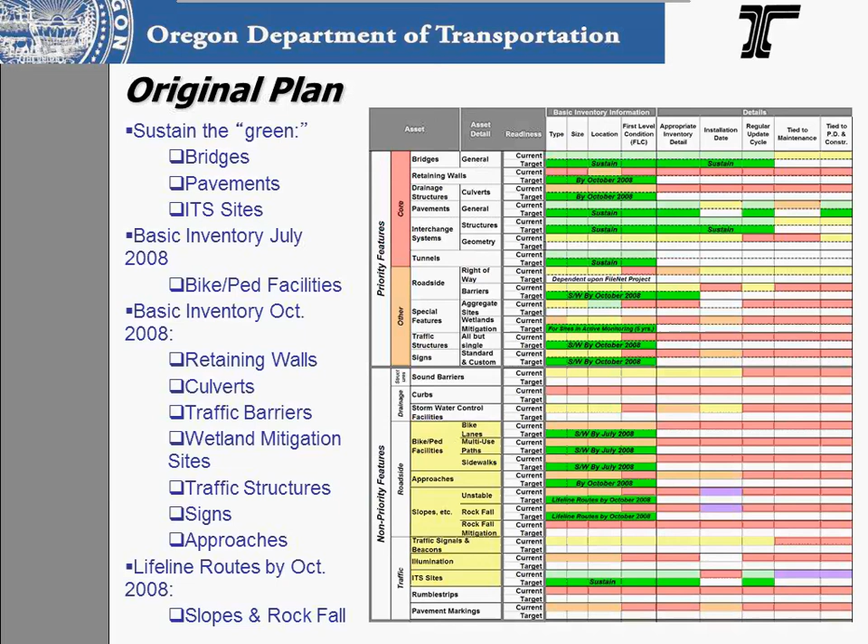I mentioned that documentation is real critical since you have various people going out collecting the data. Some of them can be your DOT staffs, we used a lot of interns, some asset managers use contractors, some temporary employees. So we developed data collection manuals for sign data, roadside barriers, bicycle pedestrian facilities, including ADA ramps and curbs, and culverts.

So how did we do? Actually, I think we did really well. Right now, we have available data on tunnels statewide, signs, traffic barriers, sidewalks, ADA ramps, bike facilities, weigh-in-motion sites, sound barriers, wetland mitigation sites, material sources, and we have partial statewide information on culverts, retaining walls, unstable slopes, and approaches. And we're just beginning some efforts on major traffic structures and stormwater facilities.

So we collected all this data, and we found out that, one, a lot of people didn't know we had it available. Two, sometimes it just sat on somebody's computer, so it wasn't easily accessible. So if you didn't know that John had the pavement information sitting on his computer, you wouldn't know to call him or email him to get this. So we developed a data sharing tool called the FACS-STIP tool.

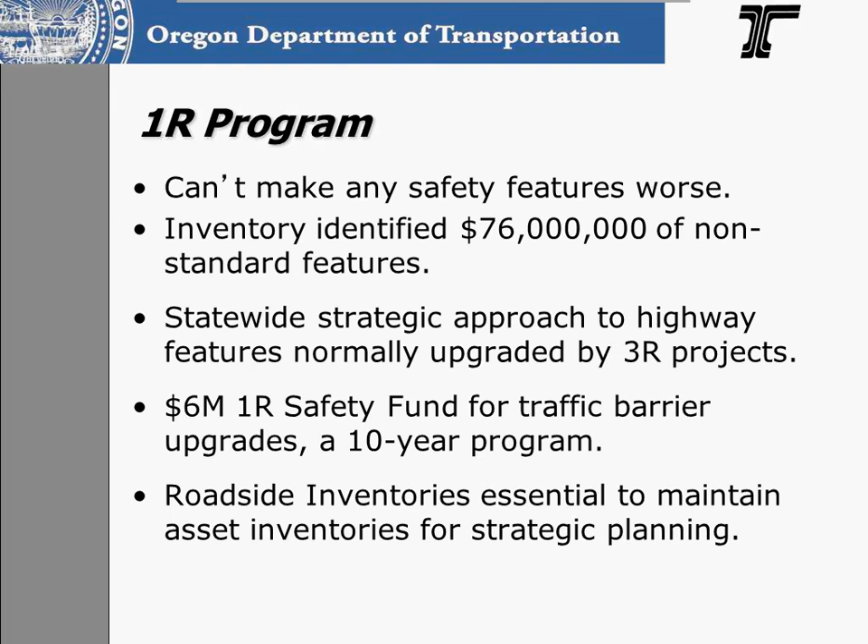It's going to be approximately a 10-year program, and we should upgrade all of our non-standard barrier features within that 10-year program. We also, since data is essential for strategic planning, implemented roadside inventories in conjunction with these projects to maintain the asset inventory.

So for the first time, we actually identified all 11 non-standard features associated with our traffic barriers, and we prioritized them 1 through 11. We agreed as an agency, working with our federal highway partners, that we would upgrade the top 7 of those 11 using that $6 million a year program. The other bottom 4 features we would upgrade after we finished the statewide upgrading of those 7.

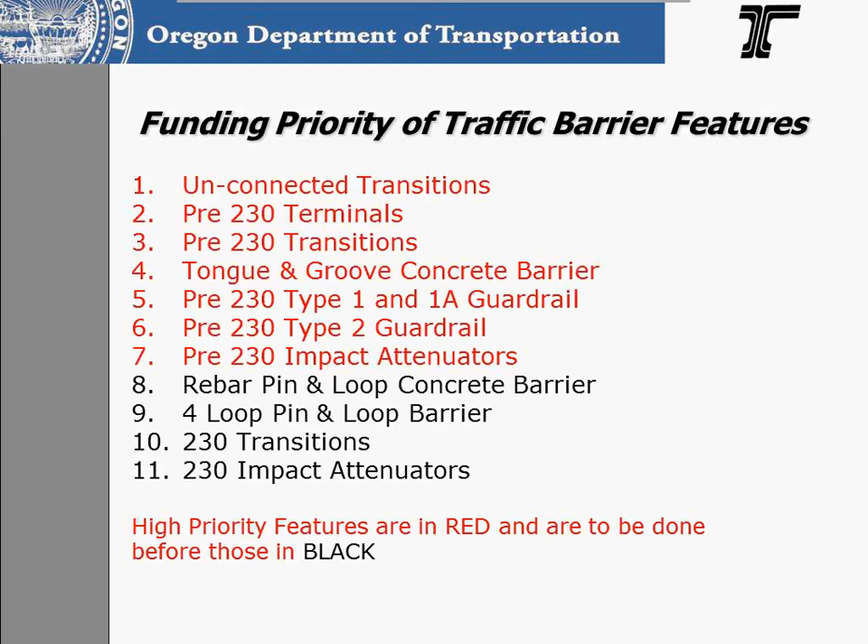Our strategy was to do the interstate system first, move on to the national highway system, and then the non-NHS system. Each of those is about a 3 or 4 year effort, so we decided there wasn't a big need to further prioritize features within those highway systems.

So other things we're working on. In 2011, we just completed the ADA ramp inventory, identified all the needs, and did an evaluation of which ones didn't meet current ADA standards. We identified approximately $24 to $35 million of statewide ADA ramp needs.

We used that to develop a 1-year ADA ramp program. It just got approved 2 months ago. It starts in fiscal year, construction year 16. So we've just developed a steering committee to prioritize how we're going to upgrade those ADA features.

We also recently, 2 months ago, developed a $6 million culvert program, also starting in construction year 2016. Our highway leadership team directed us to do culvert inventories on some priority corridor routes, giving us 2013 and 2014 to complete those inventories so we can replace or repair our priority culverts.

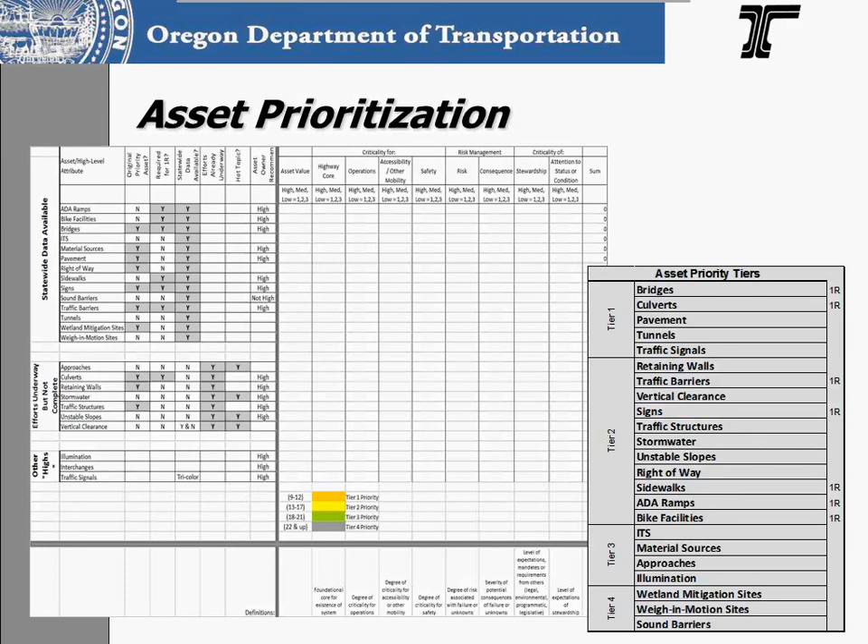We also agreed to a governance structure for asset management. At the top is our highway leadership team, which develops policies. Below that is an asset management steering committee that develops plans and priorities. And just recently, we've developed an asset data management committee to update and develop new standards for asset and data management. Then we also have what we call a Trans-COI committee.

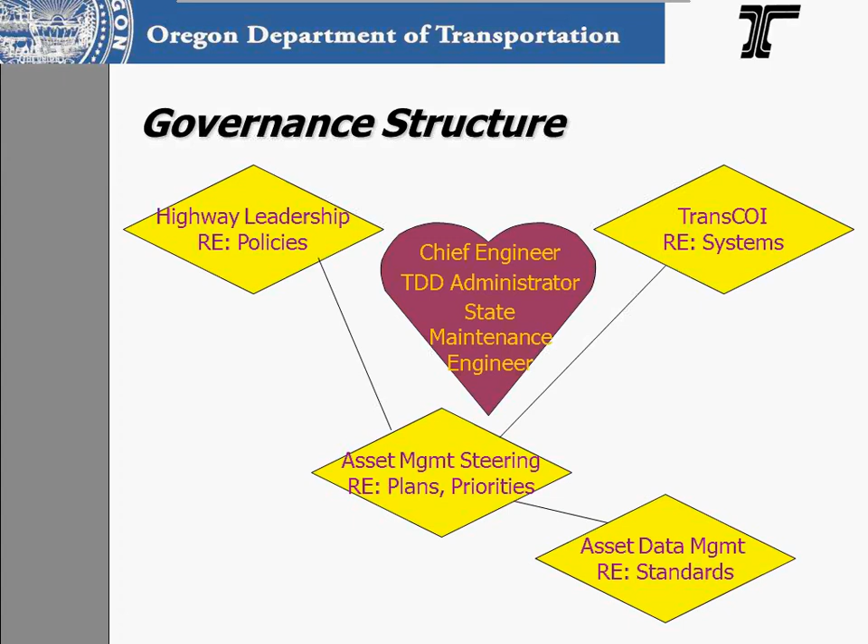That's an ITIS committee that approves systems and new initiatives for IS projects. The heart of this governance structure are 3 main people: our chief highway engineer, our transportation development administrator, and our state maintenance engineer.

Some of the things we're working on: mobile GPS applications. We developed one for approaches. Last summer, we developed one for a basic conditions inventory of culverts. We're going to be developing one for signs this spring, and then there's other 1R related inventories we'll be developing applications for, which include sidewalks, bike facilities, ADA ramps, and bridges.

We're doing a QA/QC of our asset inventories. Just last week, we completed a QA/QC of that asset management pilot project. We went back after 5 years and redid an inventory of those highways, and found that over that 5-year period, there were 16% new or modified features for sidewalks, bike facilities, ADA ramps, and traffic barriers.

That's probably low of what you'd normally see because of the economic downturn. There was less developer work in our right-of-way, probably fewer local projects on our highway system. So we're looking at that as a way to gauge how our inventories are maintaining their accuracy. We're also beginning some new initiatives on culverts, as I mentioned, and also on approaches. That data management committee is also developing and updating data standards.

So a year and a half ago, we started a unified department effort across the entire department to collect all assets from fence post to fence post. We had traffic and safety, maintenance, asset management, bridge, the TOC, motor carriers, all joined together in a common effort to collect every asset you can see, all geospatially located and providing conditions on some of those assets. The purpose was, you really can't do asset management, you really can't do safety management if you don't know what you have. So we're quite excited about this project, and I'll tell you a little more in the next couple slides. This picture represents the LiDAR and imaging.

You can go to the next slide, thank you.

So what is a data collection project? As I said, we started about a year and a half ago, enterprise across the entire state. It's a continuous survey of the entire state highway system. We collect information in both directions. It's about 6,000 centerline miles, and when you do both directions, plus visitor centers, ramps, rest areas, welcome centers, ports of entry, you get about 14,000 driven miles.

Scope - as I said, we collect everything. We start with pavement condition. We've been doing that for many years, but we're continuing that effort where we collect rutting, cracking, faulting, environmental cracking, surface areas. We wanted to know exactly how many square yards of pavement we had, whether it was concrete or asphalt, and where it is. Also bridge clearance, enhanced bridge deck analysis.

We're collecting cracks to 32nd of an inch. Geometry - we're going to have horizontal, vertical, and cross slope of all those 6,000 centerline miles, 14,000 driven miles. Geolocate all the assets, as I mentioned before, but what it includes is every sign that we have, every signal, all the paint lines, the markings, the intersections, the barrier, guardrail, rumble strips, retaining walls, noise walls, billboards.

And I didn't mention how we're doing this. The middle picture is the Velodyne laser. It puts out 1 million points of light per second. And that point cloud generated by the LiDAR is responsible for geolocating all of those assets.

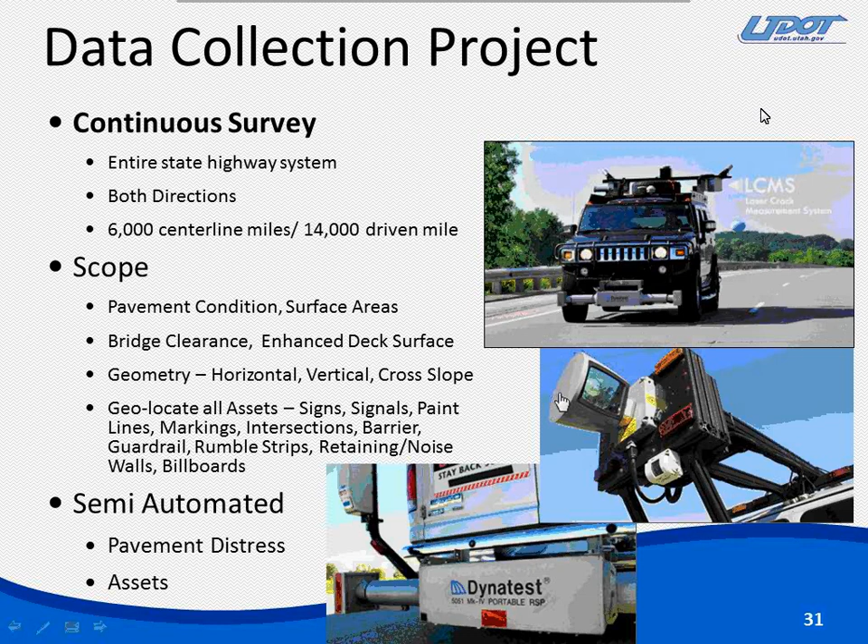So the work product - Matt, you want to step through these? Right-of-way digital imaging, we take 200 images per mile, that's every 26.4 feet, 400 in both directions. There's 3 images stitched together. The resolution is 2400 by 3200. We're going to have 5 to 6 terabytes of imaging for the entire state. Along with that, we're going to have a workstation, and all those assets I mentioned in the last slide, you can sort, query, export, do analysis.

That's part of the tool that the contractor is providing, and this is by Mandli Communications. It's the winning contractor on this.

Next map. And then to make this asset extraction economically feasible and very accurate is mobile LiDAR. That's a picture of a section of roadway. You can see the striping. You can see the railroad crossing symbols.

I mentioned project funding and project cost, and the reason we can do this, why we can collect every single asset, is because we have a joint effort between primarily planning, central maintenance, and traffic and safety. This is a little bit like - I understand the former Soviet Union didn't have a very good telephone system, and so now they have a great one with cell phones, they just skipped the hardwired part. That's sort of the way it was at UDOT - we had no idea where our assets were, our inventory was. So luckily, the technology is ready for us now that we're ready. The price is quite high, as you can see - it's $2.5 million.

Next slide please. Now, why do we collect all this data? I'm just going to show you two slides in succession. This is our statewide pavement management. Next, Matt.

So what we're representing here is the condition: green, yellow, red - good, fair, poor. And it's historical data, and it's also forecasting trends, specific budgets and projects. And then we have thresholds, upper and lower thresholds.

So what we're able to do with this slide is we're able to predict the future. If we have $200 million, this is where we're going to spend it. These are the projects, and this is what we expect the condition to be. So instead of reinventing the wheel for all those other assets, we're going to replicate this exact same model that we used very successfully here at UDOT on pavement for our other assets.

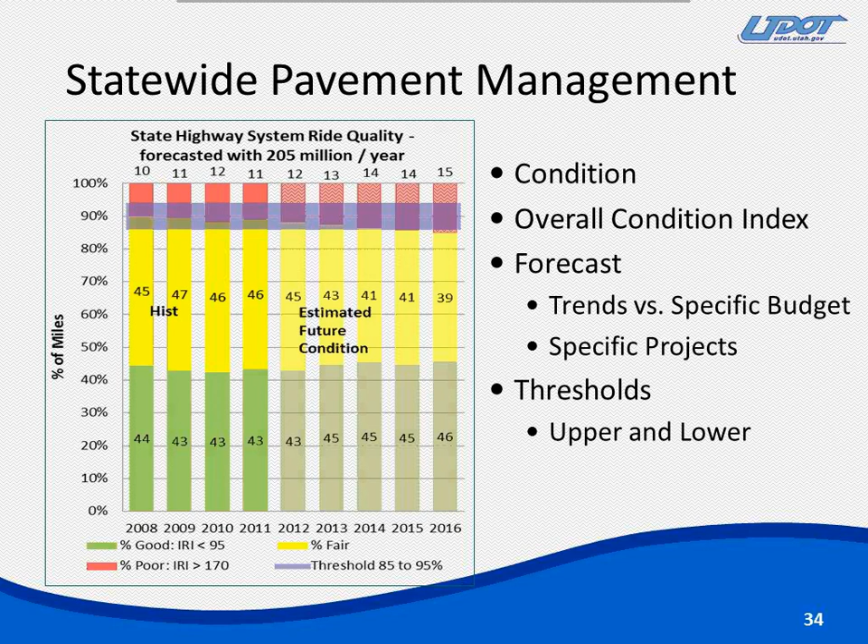Next slide, please, Matt. So we have developed a statewide bridge management system, and I hope the graph looks similar because it's the same type of graph. It's showing historically what our bridges have been like, and it's showing if we spent $20 million a year for preservation, this is what we expect our bridges to be in the years 2013 to 2017. We have a target - good, fair, poor. And so our model now, we can predict the future, recommend projects, and stay within our targets.

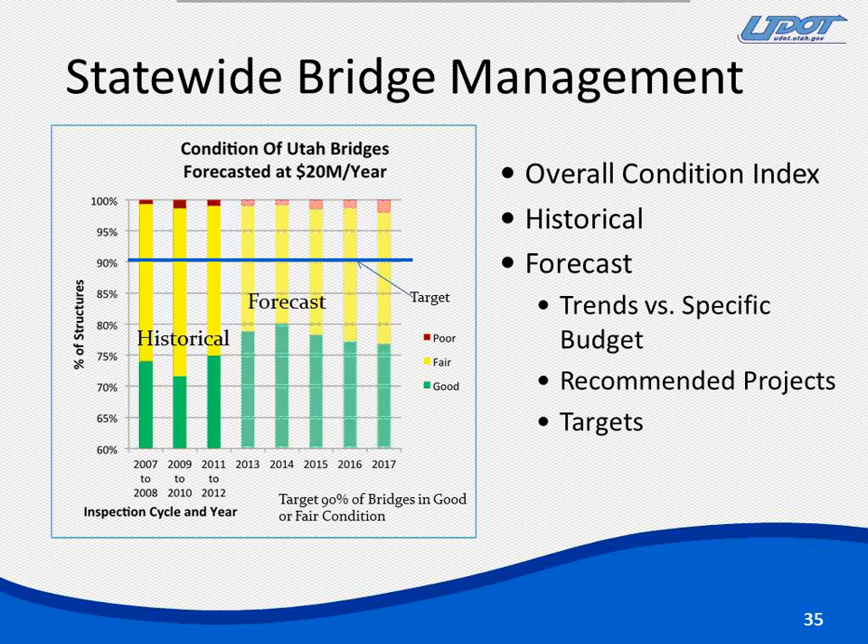This is Robert Hull, I'm the Director of Traffic and Safety for UDOT. I'm going to go through the next several slides here to talk specifically about the safety component of our effort. As you can imagine, it really started off as the basis of looking at MIRE, the Model Inventory of Roadway Elements, and what's critical to safety management. When this first came out, there were recommended 202 elements. Further refinement from FHWA, represented by the next bullet point, really focused down onto 38 fundamental data elements.

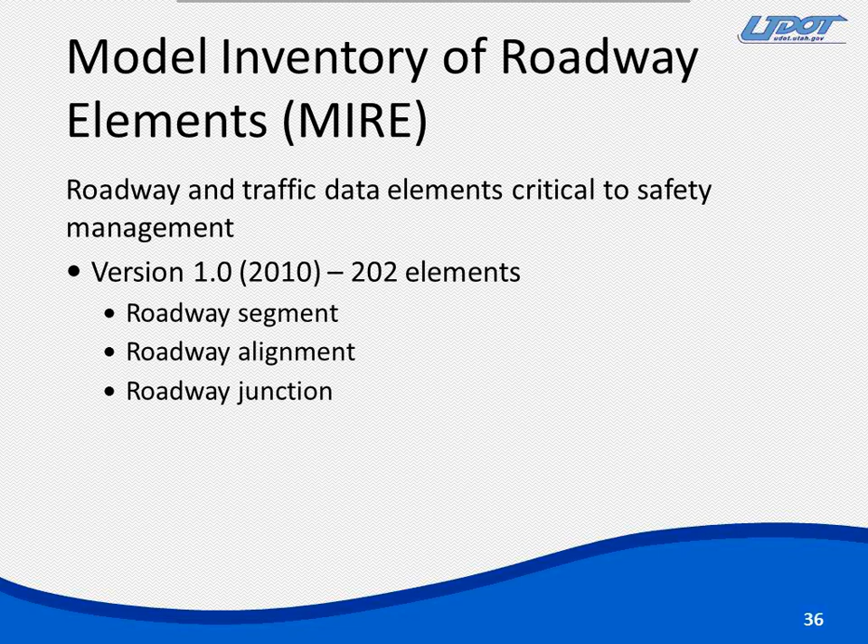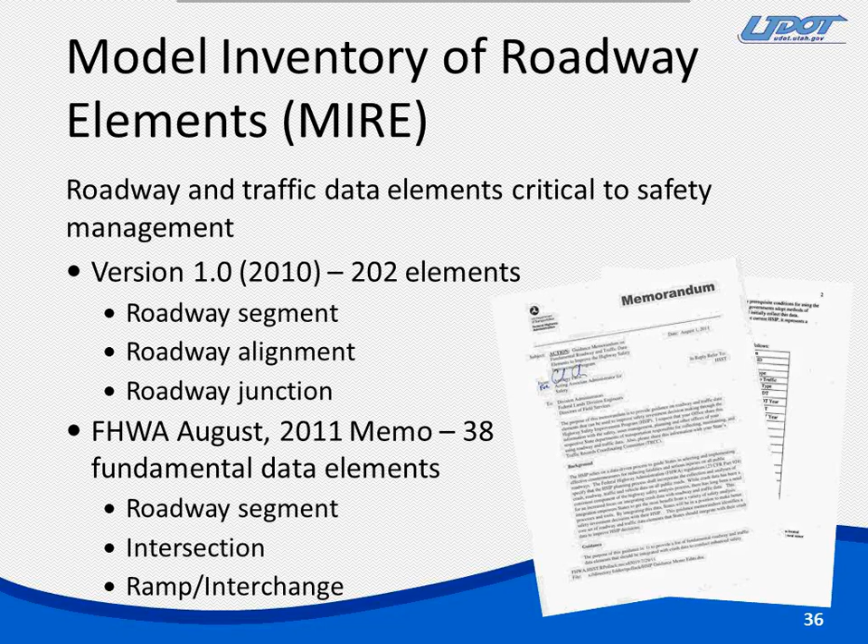Now, the interesting thing about this is we had already started down this path, and as Stan has mentioned, we were doing it sort of in the very old technology version, and so we were moving that direction when we had the opportunity to collaborate on this data collection process. The 38 elements really are now kind of our guidance moving forward. As an example, and what you've heard from Oregon is an example of one of those efforts that we're going to be focused in on, and that's statewide sign management.

The real critical element for us is that we don't have any information on our assets from a signing standpoint. Over the last decade or so, we've built some fairly large highway projects here in the state. And the problem is that all of those signs are going to come due in terms of the life cycle, and we don't actually have a program to fund this for the future, so we need this information to develop that long-term program. Next slide, please.

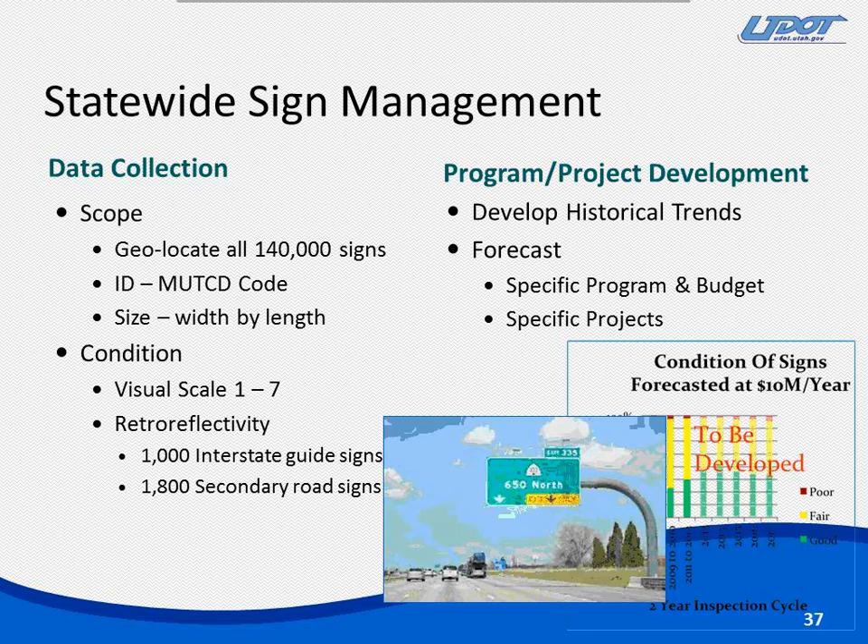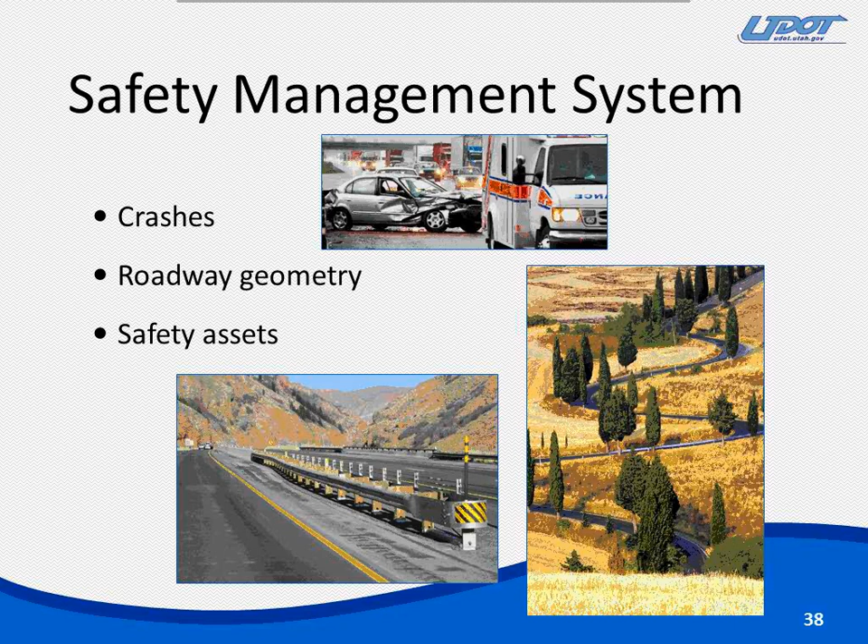Our next topic, where we really wanted to talk, was the safety management system, and how this data collection project is really going to help us marry our crash data, the roadway geometry, and the safety assets, bringing all of those together into one location, one opportunity for us to do the analysis on that. This just really continues on with the efforts that we've had so far. We're working with Esri, we've worked with the AAA Foundation for Traffic Safety and the US RAP program that they sponsored, and us as a partnership.

We're geolocating all of the data and doing an analysis statewide by corridor and by spot location to help us prioritize the limited funding that we have. And what you see here is a couple of examples of our risk maps that are based on the U.S. RAP protocols. This is information that all of our staff throughout the state uses to develop safety projects. Next slide.

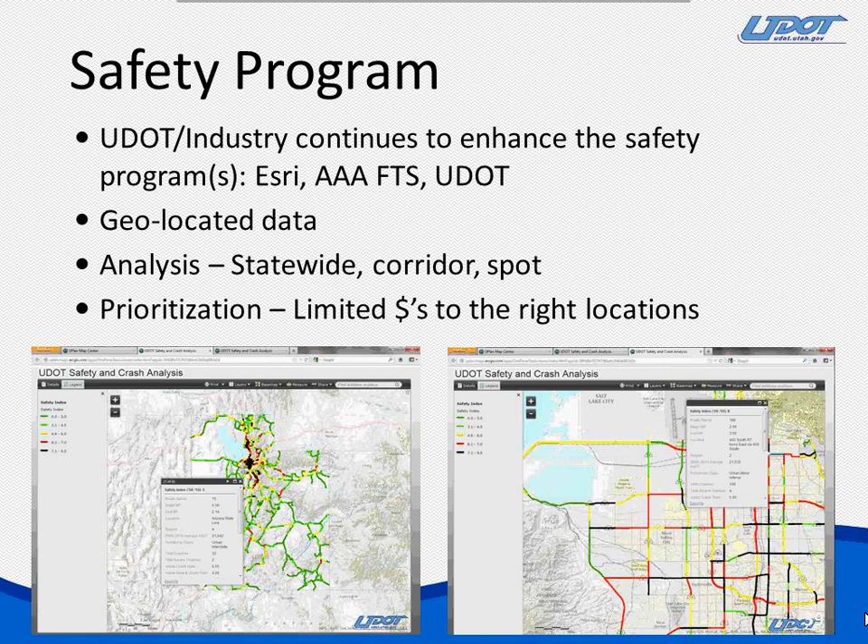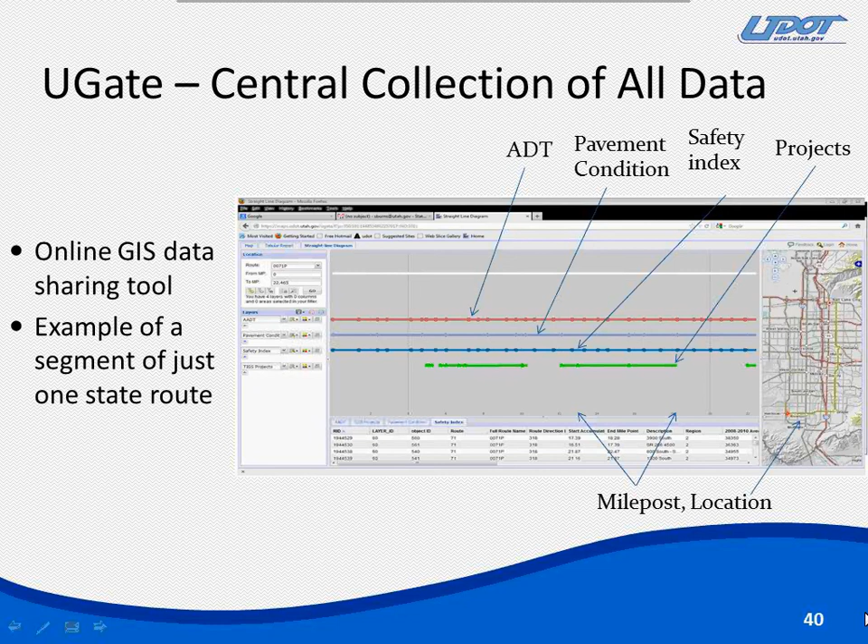With that, I'm going to turn the time back over to Stan. This is very analogous to what Oregon showed you just recently. We have a geospatial database where we can add any of our features that we've collected and show them - we call this a straight line diagram. Here I'm just showing you ADT, pavement condition, safety index, the location, and the mile posting.

That's fine, next slide, Matt. So it's very similar to what Oregon showed you. It's interesting, we didn't collaborate, but it would have been interesting to compare notes as we were building.

Looking forward, as Robert said, we're going to develop a sign management system. We're developing a culvert management system, enhancing our safety management system. But one of the big and exciting things about this data collection project is because we're collecting every single feature you can see from milepost to milepost, geospatially locating all of it, we're going to be able to build all these management systems. This might be a model for MAP 21, it might be a model for other DOTs.

So we've talked to Esri, Oracle, Bentley, Mandli, Deighton, Agile Assets, Virtual Geomatic, AAA, Utah State, and we're forming collaborative relationships with all of those. And we're building prototypes on safety, design, integration, and asset analysis.

The ultimate goal of asset management, safety management, is to answer this question. We're building all these silos. You've heard Robert talk about signs and safety, you heard me talk about pavement, bridge, and I just mentioned culverts. But how much do we put into each one of those buckets? So we are still silo-driven at this point, and we are not crossing those boundaries because, quite frankly, we don't know how to answer that question.

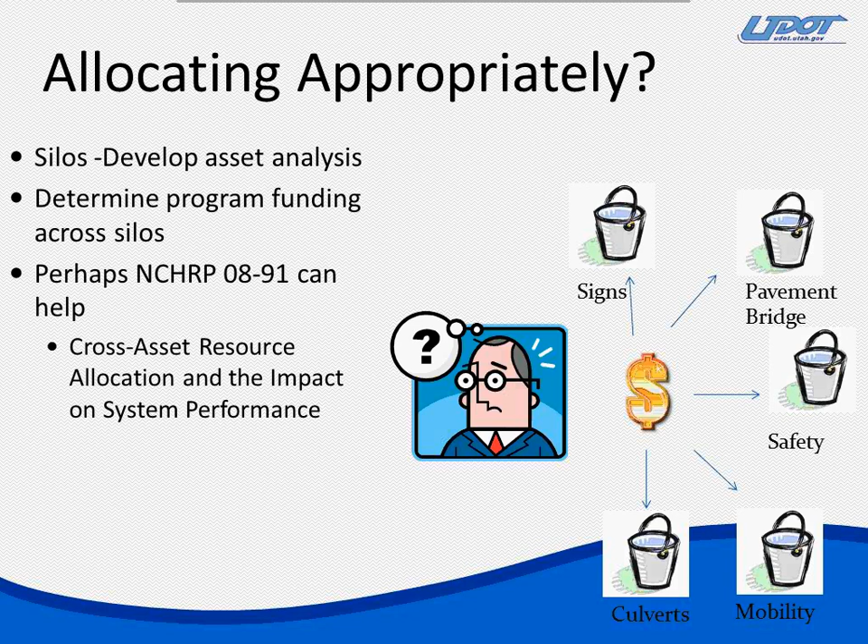I do know that there's an NCHRP study going on right now, 08-91, that's going to try to look at this issue and resolve it for us. They're going to ask for state volunteers and develop a prototype for resource allocation. Maybe this can answer the ultimate question we have at Utah DOT: how much do we end up spending, how much do we put into each bucket, and what are the outcomes? What happens to signs if we spend X dollars on it as opposed to pavement?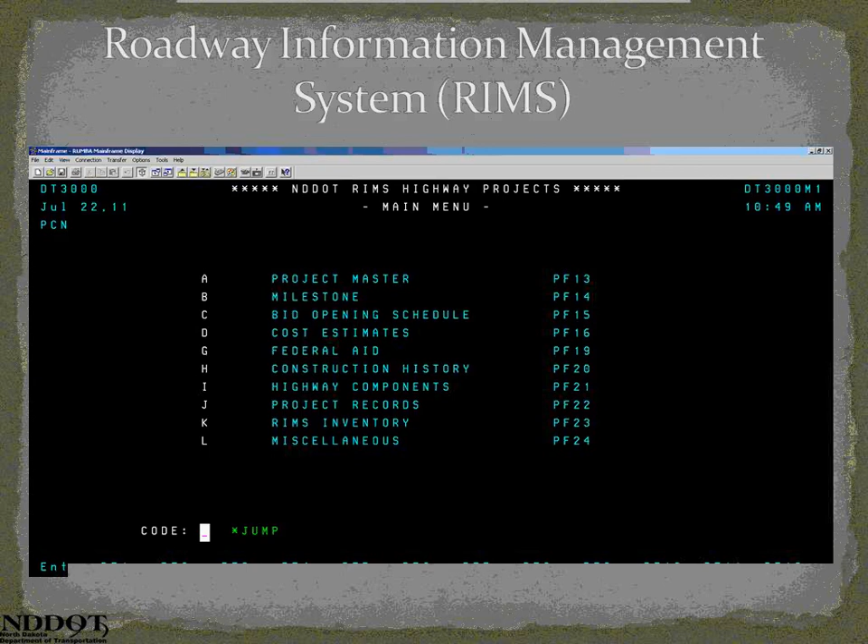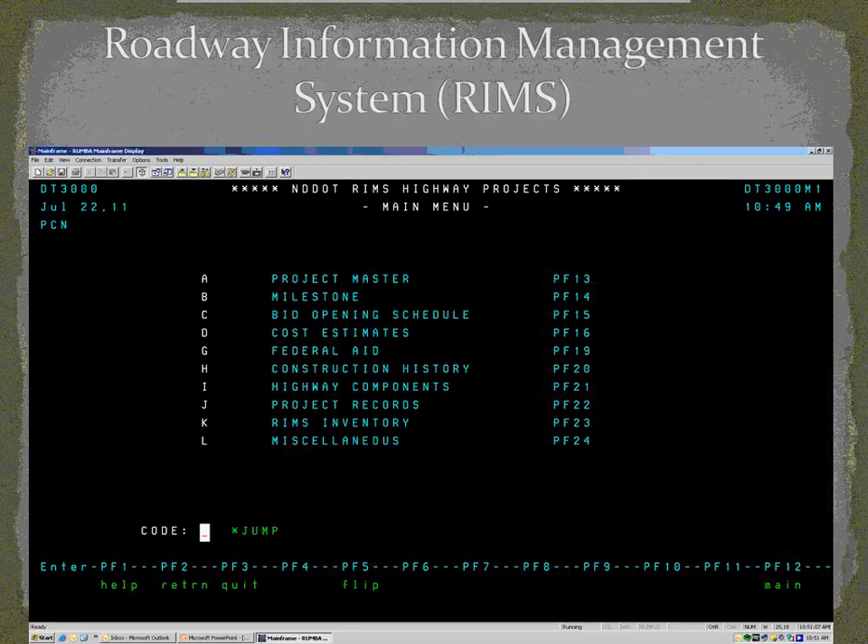As I said, this is obviously a very archaic piece of software, but my predecessors back in the 1980s had the extreme foresight to put all of our asset information into a single program and package. This is the main menu screen from RIMS, which gives you an idea of how wide an area of information is actually covered. It has everything from project scheduling to project development milestone activities, construction history on the various segments of our highways, what those highway segments contain as far as materials, and an inventory of the various assets we have out there. It's an extremely powerful, beneficial piece of software in that everything is interconnected. As I talk to colleagues around the country, I find out just how unique this is and how great a tool it is for us.

We've tried a couple of different times to replace this software. It's a difficult thing to replace because of what it does contain. But we are attempting to replace it yet again because mainframe applications are just extremely difficult to maintain.

What you're now looking at is the sign information that we have within RIMS. Like I said, it's an extremely deep piece of software - obviously this screen just looks like a jumble of text, but let me break it down a little bit for you. The white portions of the text on this screen you can think of as the section breaks.

So up at the top, we have the assembly information: location of the sign, the highway number it's on, the reference point, the distance from the center line, the height of the sign, the post size, and even the type of post it's mounted on and the number of posts.

Moving down into the next section, we're looking at the sign information itself. We have the MUTCD sign number. We know this is a stop sign. We have the size of the sign, the size of the legend text, and the type of material the sign itself is made out of. In this case, that back material is a flat aluminum sign.

But then the interesting piece comes - if you back up just one second, Matt, I'm sorry. The maintenance activities are the next elements recorded in here. First, moving over to the right-hand element down at the bottom, that's basically the initial installation date.

So what that tells me, coupled with the next one over, is that very little has happened to this sign, or at least nothing's been recorded as having occurred since it was originally installed in November of 2001. But the left-hand code tells us the sign was inspected on September 7th of 2012, and that it did not pass inspection. So this sign is scheduled for replacement as a result of not passing inspection.

Everything above these maintenance activities is incorporated into the next application. Very similar to the other two states, it's a GIS-enabled piece of software. We call this our online roadway analysis and mapping portal, or OnRamp. This is intended to be almost dummy-proof, if you will - a very simple piece of software from a user perspective, with a tremendous amount of development time by some really talented GIS people within our department.

It's very similar to Google Earth, if you will, except there's a lot more information here. Very similar to the other states, everything - or not everything, but the vast majority of things we have in RIMS - is accessible through OnRamp.

We are currently working to get that maintenance information that I talked about for these signs into OnRamp. What our GIS people did was develop lookup tables that allow people, with a single click of a button, to access that RIMS data that I just showed you. Obviously, this is a much more user-friendly way of accessing that data.

And what we have through OnRamp: light standards, culverts, pavement condition information, some bridge information, guardrail - virtually all of the assets you may want to know about within our right-of-way. But in addition to that, we drive our entire system with a pavement management van, similar to what UDOT just talked about. But we do the entire system every year. Our undivided highways are driven one direction each year. Our divided highways are driven both directions each year.

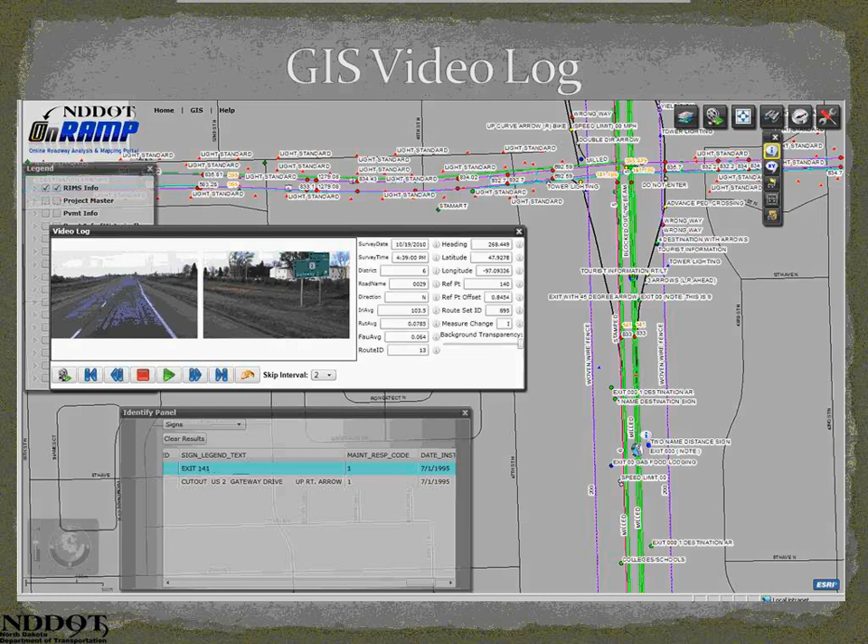As most of you are well aware, the 2009 edition of the MUTCD required agencies to implement a retroreflectivity maintenance program. That was originally supposed to be implemented by January of 2012, but a later revision moved that to June of 2014, and also reduced the scope of the requirement for which signs need to be incorporated. We now have to have the regulatory and warning signs done by June of 2014.

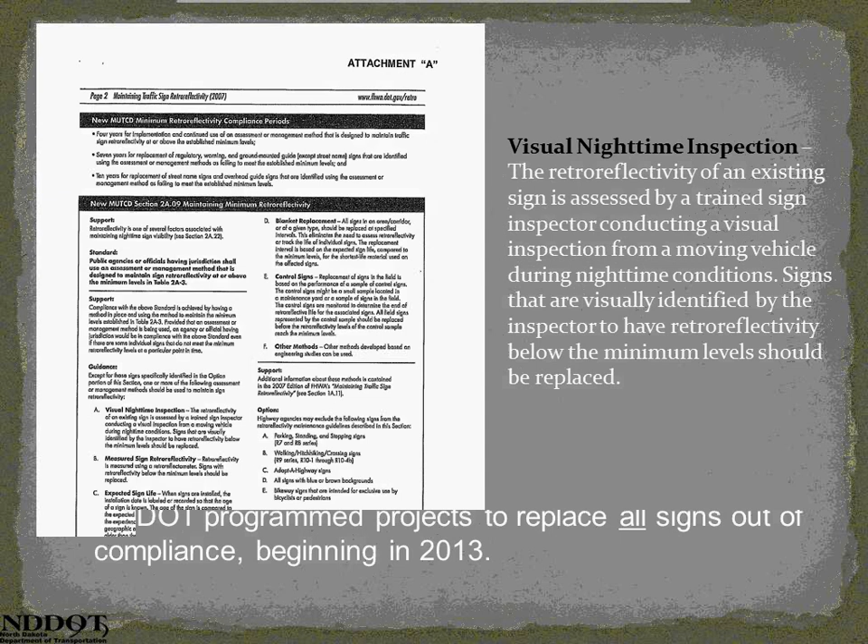The MUTCD has multiple options for the inspection method. What we chose to do in North Dakota was use what's called the visual nighttime inspection. Basically, trained inspectors go out and inspect all of the signs on the system every year, and they inspect those from a moving vehicle at normal operating speeds.

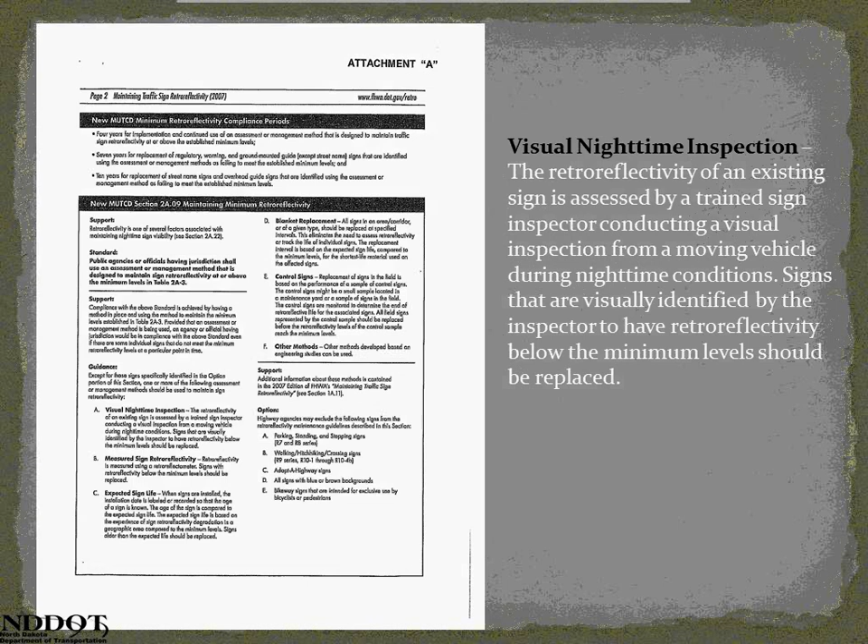The way we're doing that is our maintenance division purchased a retroreflectometer and provided that to our materials and research division. We then used that to establish control signs. Those control signs are stored at Materials and Research, but at the beginning of each inspection season, they send those out to our inspectors.

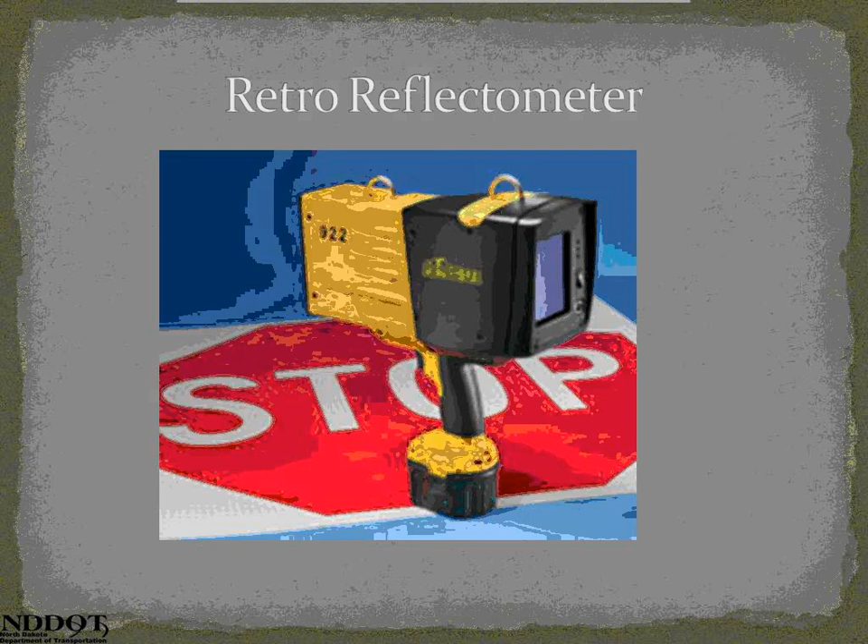The inspectors view those signs every day before they go out and do their inspections. It's not just a single viewing at the beginning of the season—every day when they go out, they view those signs to essentially recalibrate their eye, if you will.

Those signs are then sent back to our Materials and Research Division at the end of each season to be checked to make sure they still meet the retroreflectivity requirements. Basically, those signs are set up so that they're either right at the limit or slightly above the required limits, and then using highway speeds, our inspectors are able to make decent headway on inspecting those signs.

The current status is that 5 out of our 8 districts have completed their surveys for this year. Of the just over 40,000 signs that have been inspected, about 4,900 of those were found to be non-compliant for retroreflectivity, which averages out to about 12%. Obviously, that's a little bit over the 10% we had estimated, but it's well within tolerance.

We're not sure how that's going to continue into the future. We haven't decided the full extent of what we will do with sign management going forward—if we will simply continue to replace non-compliant signs, if that's determined to be the most cost-effective, or if we are going to do something more along what Utah just talked about and actually model the sign deterioration.

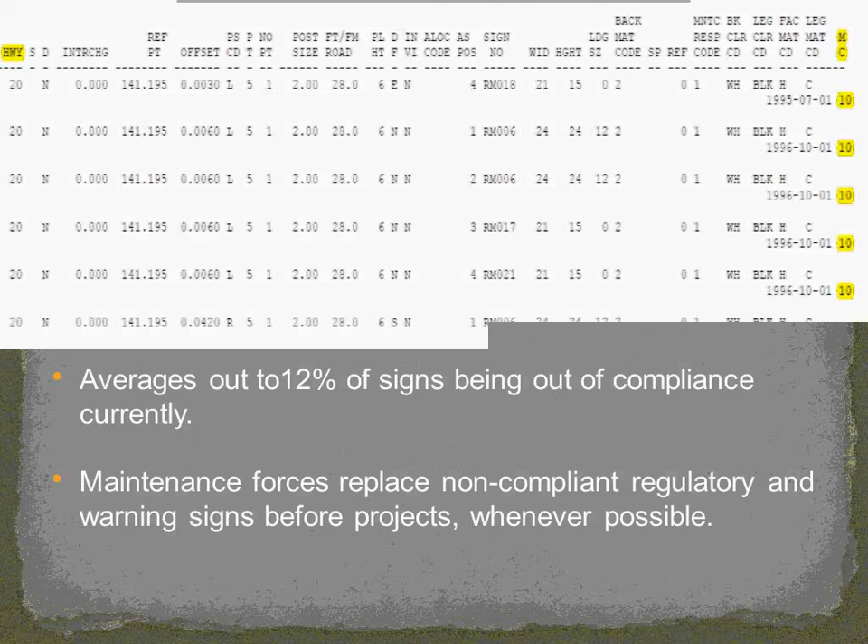In addition to programming projects, our maintenance forces will actually replace signs—the warning and regulatory signs as well—even ahead of the projects, because our basic thought is that those signs are important enough that they need to be addressed as quickly as we reasonably can.

As I indicated a little bit ago, unfortunately OnRamp at this point in time does not have the maintenance code information in it. But what we can do out of our RIM system is provide a report that basically gives all of the non-compliant signs, and our designers then use that to design the projects they need to do, and our sign shop personnel use this to determine which regulatory and warning signs they need to replace even more quickly than that.

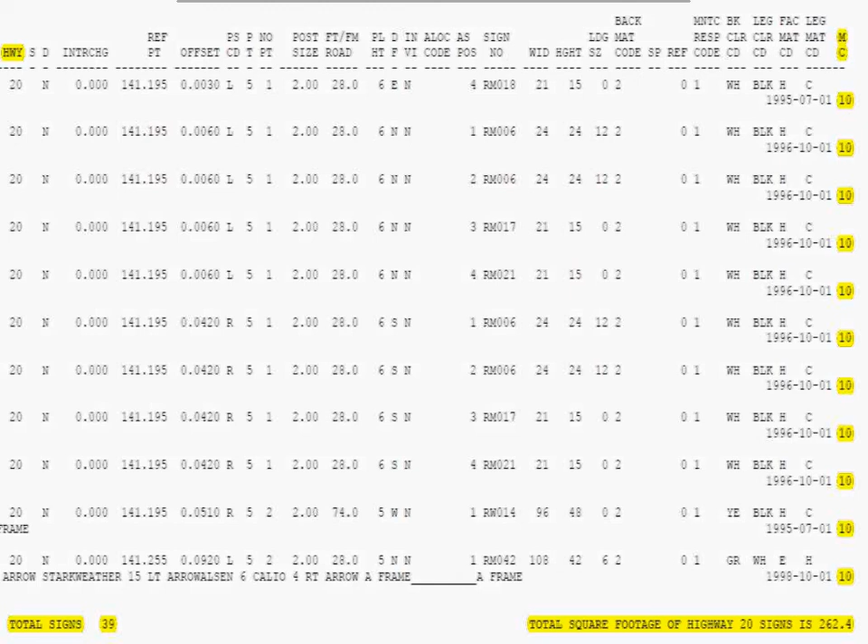As I said, we are working to get this information into OnRamp. It's just a matter of preparing an adjustment to a lookup table.

And I also wanted to just put in a plug there. Oregon's example of how to set priorities on their guardrail is great.

So one of the big things I really wanted to stress here is getting this information out there in the hands of the decision makers well ahead of the project selection process. That's really one of the main things we're trying to do, so that safety is not one of the add-ons that happens later on in the project stream.

Safety decisions come from many sources, obviously. Network Safety Index, which Wyoming uses, compares the like types of roads into quartiles and hotspots, so that a particular segment of road, whether it's in the top 25% of the accident-producing areas within the last 5 years worth of crashes there.

Then from that, we developed - really when we talk about safety projects in Wyoming, we really have three types. We have the systemic, such as trying to get rumble strips on all the roads that we can. Some standalone things, such as hotspot corrections, like if we had an intersection that needed a turn lane or something like that. And then the third branch is when we do them in conjunction with other construction.

A complicating factor with this, when you talk about safety being tied on to other projects - we'll take Oregon's example again of the guardrail - is that if you're doing something out there like making the guardrail lower by putting an overlay onto it, that may actually move how your ranking system is on those guardrails. So we need to be aware of that.

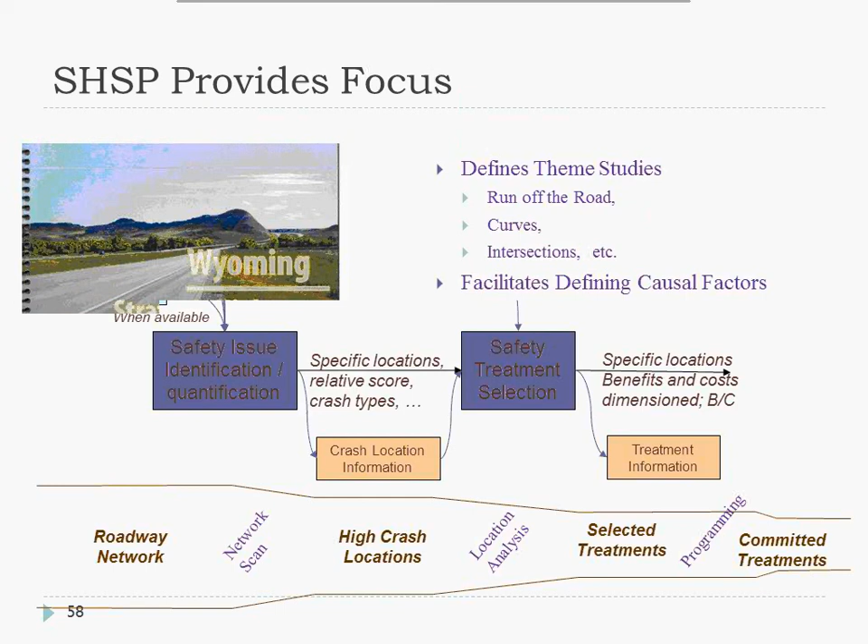These all contribute to the identification of locations and a template of what we're trying to get fixed. And where I really tried to document that out is in our Strategic Highway Safety Plan.

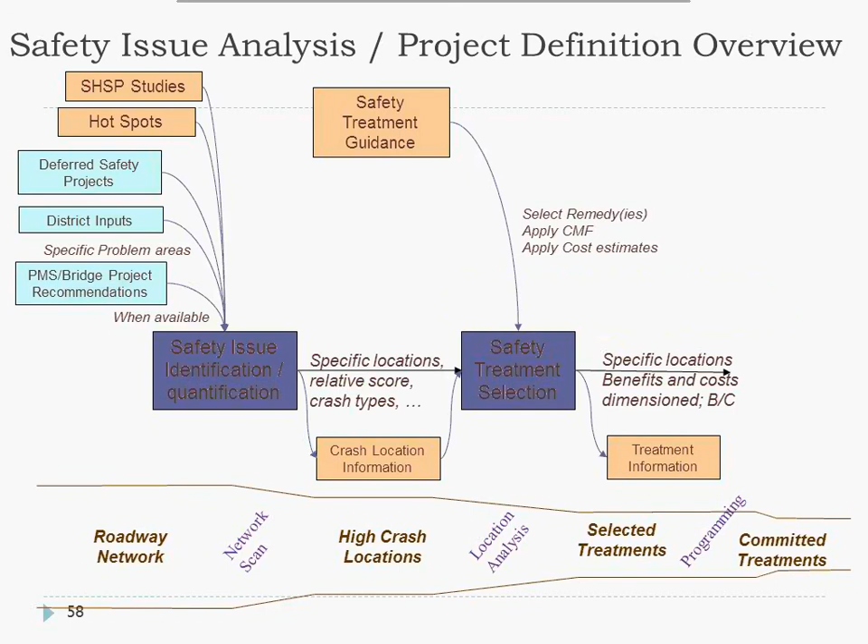The critical thing I really stomped the floor on with the Strategic Highway Safety Plan that all the states have is, really, when I deal with this as a planner, it turns into one of those proverbial onion kind of things, where you have to start asking yourselves, what types of crashes are we really going after? So, for example, the types of crashes in Wyoming that we're going after are the run off the road, the curves, and the intersection crashes.

What are the overrepresentation factors that are out there, like the young drivers, the speeding, the weather, and what are the infrastructure items that may contribute or help in order to decrease these crashes?

So years ago, Wyoming spent a lot of effort trying to make things safe in everything that we were doing. Well now we're trying to change our focus a little bit to spending on the items that we really think are going to make an impact on the number of fatalities and serious injuries.

So let's go and talk about a specific way that we went through that kind of ties in what everybody else has talked about with the themes documented in our Strategic Highway Safety Plan. And this is an example of what Wyoming did for the curves.

Wyoming has about 8,000 curves in the state, but when you look at the Pareto chart, we definitely had 300 that were at least 10 times the average of the crashes that happened on the curves out there. That really was able to get our people to start zeroing in rather than just trying to fix everything whenever you touch a project there.

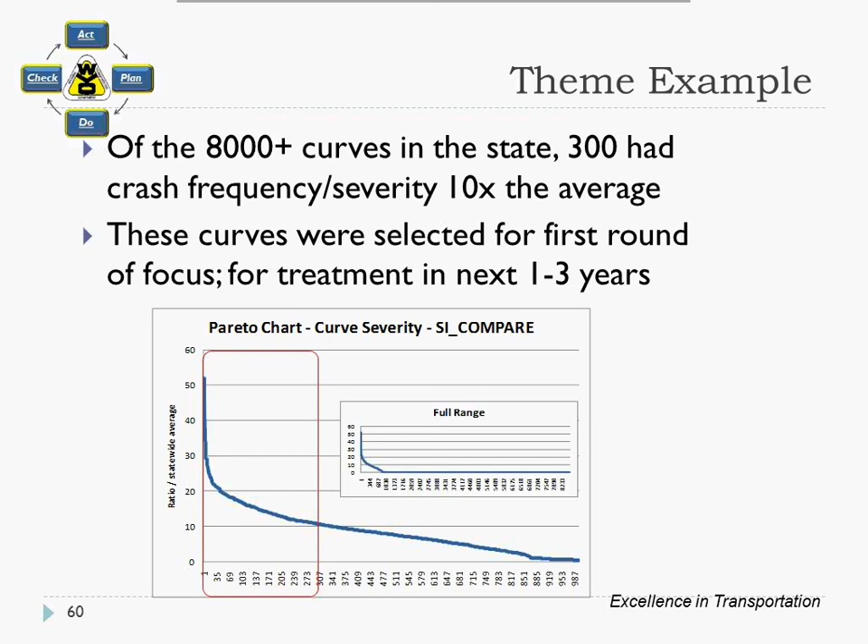So, out of these 300 curves that we looked at, we also tied it in with the other things we're gathering. Utah talked about the cross slope, which gives you your super elevation, so you got the radius. Utah will have the shoulder width, we had that from other places. Really what it did is, from a data standpoint, it told us on those curves that it wasn't just the radius or the shoulder width causing the crashes. It was other things out there, and so that gave us a focus.

So when we looked at the remedies we have out there, we looked at those first 300, and got our traffic experts sitting down in a room, without going out there and looking at the 300. They started off with a huge number of things we could do, but after some prodding they narrowed it down to 24 things we really think we could go after first. Then they went out and looked at a sizable percentage of these, and it came back that there were really only about 6 remedies that applied in nearly all cases.

Now we're getting down to where you can almost build a decision tree on shoulder width or on if there's a guardrail existing there, that these other inventory items take care of. When you get Utah's inventory done for a guardrail, you can start comparing that with these crash areas. Some examples of what they're coming up with: flashing beacons, chevrons, rumble strips, painting of the guardrail, ITS solutions. Those things all were tying in there.

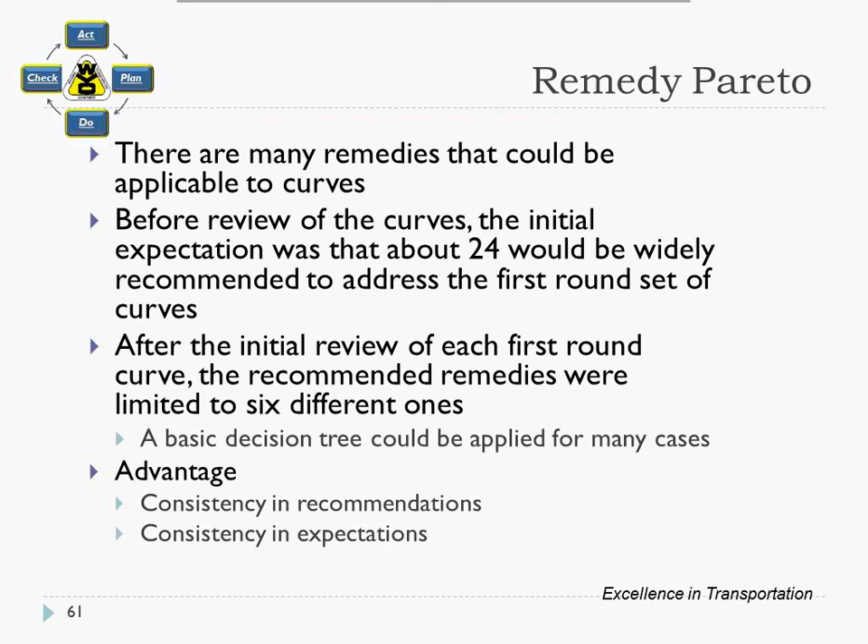This gave me the big advantage of a planner as an asset manager. It gave me consistency in the recommendations, and it also allowed me to predict some outcomes of what I was expecting to have out there.

On the next slide, I call it benefit to cost convergence, but really what it is, I need a consistent way to determine which projects have the greatest value, because that's really what we should be concentrating on in order to reduce fatalities and serious injuries out on the road. The process we went through with the curves showed that we could come up with a limited number of remedies that we would normally propose on average, and those that we could also predict an average cost and an expected result.

From that I could come up with a prioritization of projects that could be rank ordered against each other. That's what would give me the stack of prioritized safety projects, basically 1 through 100 or something like that as a starting point.

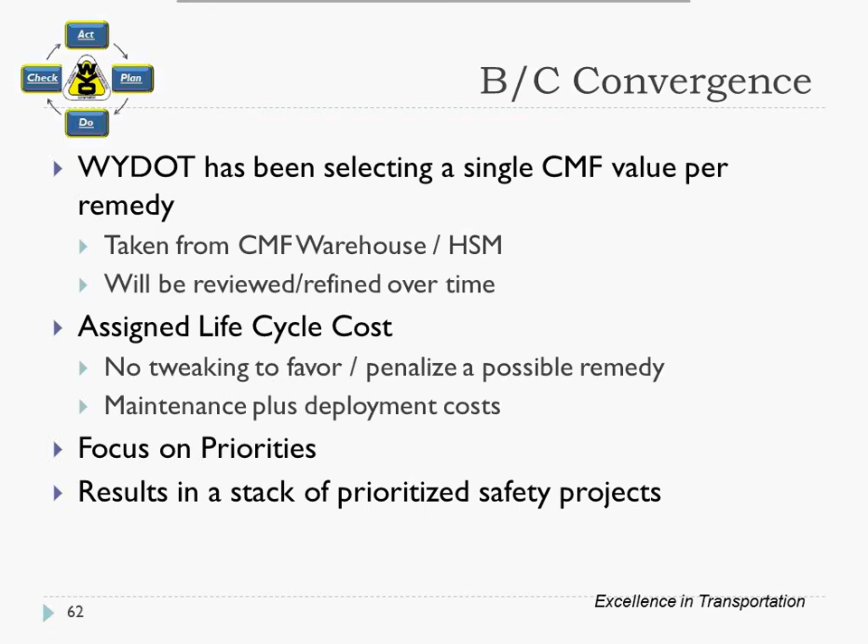So how do I tie that in with my planning? Wyoming is using a process where we try to look at the entire corridor out there. We have the strategic plan, which includes building safe and efficient highway systems, the long-range plan that shows how we're going to be spending our money, the corridor vision of what an entire route should look like, and then the corridor plans, which is what we're going to talk about here for a minute.

On that overall corridor, I want to be able to answer the question to decision makers of, within that corridor, what are the biggest safety projects we really should be concentrating on to get the biggest return on our investment. So, looking at it as an overall corridor, defining what the gaps are, coming up with a solution set, and finally coming up with a recommended list of projects for that corridor.

I want to pause here and stress to everybody, we are not using the computer to drive the decision making on what project to do next. Rather, this keys us off on going out and looking at these safety remedies, and then the traffic professionals can actually make the determination of what the best areas are.

But this should give them a big leg up on identifying areas that have the highest potential for an engineering solution to correct the problems out there. So far I think it's really changing how Wyoming is starting to look at these projects.

So in summary from Wyoming, I want to stress the strategic highway safety plan, where we get a multiple discipline team in to build this plan, and it starts to focus on what types of crashes we could be concentrating on to prevent. From there, our experience in Wyoming is that we can come up with a recommended set of treatments that solves about 80% of the problems that are out there.

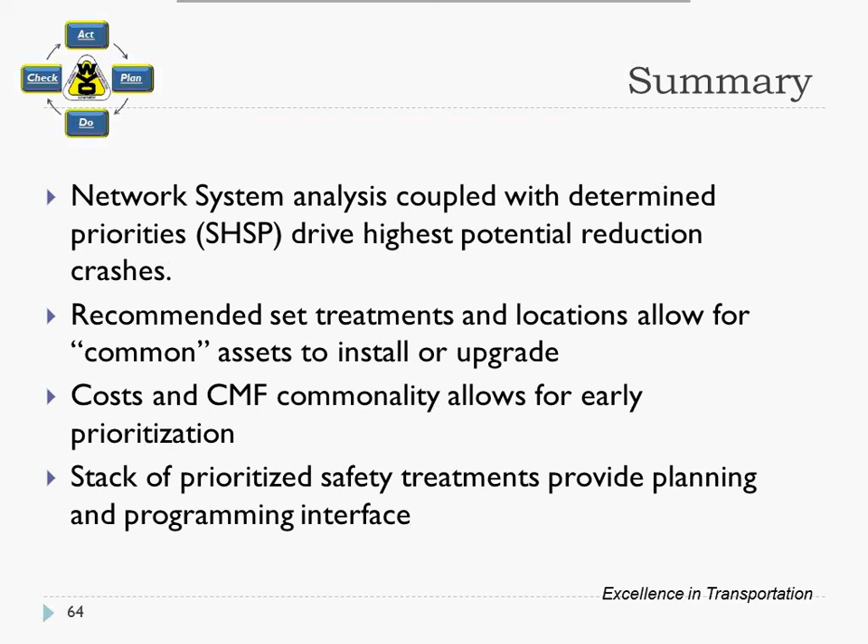So with that, I'll turn it back over to Matt, and he can lead us off into some finishing things and lead us into questions and answers. So thank you.